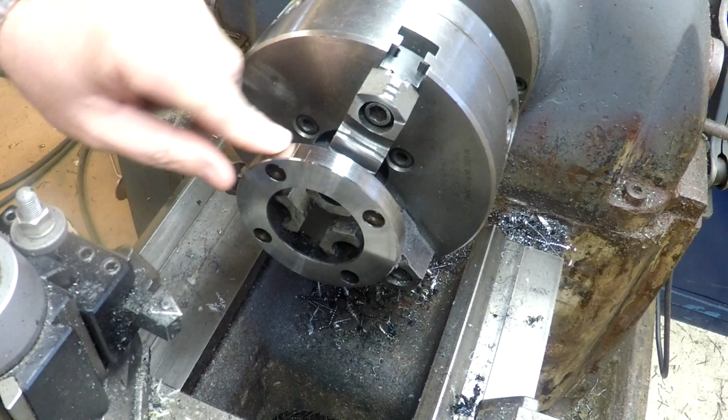All right, here's the part in the lathe, and I've already taken a cleanup cut on this OD. Literally just the minimal amount that I could take off to get rid of all the paint. And I took a very slight face across this front, put a nice chamfer on this corner here so that I don't cut myself wide open.

And you see I'm holding it on the ID, and the ID is the one that's really bad. Got a ton of paint gooped up in here. So I'm going to swap these jaws around, grab it on the OD, and then we're going to take a cut on the ID. Then we're going to move over to the mill and put this extra set of holes in here.

All right, we're going to go ahead and swap our jaws around here. And you know, this is a task that you do a lot if you're doing a lot of work on the same machine.

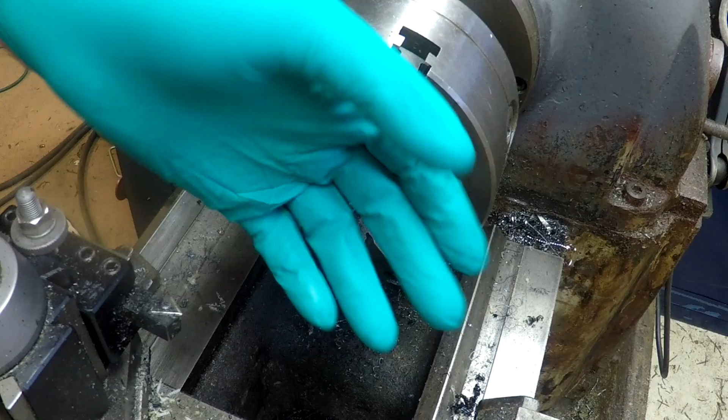So you notice I have a glove on my left hand. Those fingers that I sliced are still recovering, and I don't want to get cutting oil and other contaminants in those areas. So I'm wearing just nitrile gloves. These will tear quite easily and rip right off your hands, but I will be very careful.

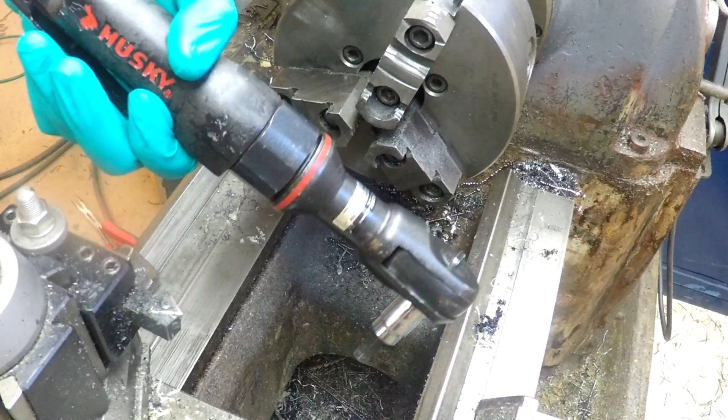So my favorite tool for changing the jaws around is a little air ratchet. This is just a little cheapo Husky, Home Depot brand 3/8" air ratchet. But it sure does make the job a lot easier. All right, we're swapped around, clamped in here.

Okay, I've already taken a facing cut on this thing, and I just want to clean up this ID, so I'm just going to manually kind of line it up. Spin it around a little bit.

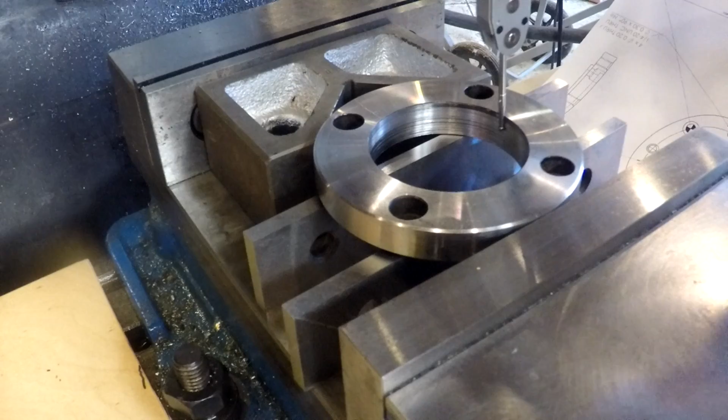Alrighty, we got our part in the spindle here. We've got an indicator, and this is the trusty Noga indicator holder that's designed to go in your spindle nose. It's in a drill chuck right at the moment. And so I'm indicating front to back.

All right, real close there. This is a 10th indicator, so it's probably a bit much for this app. There you go. So that's front to back. I'm real close there on my Y, so I'll zero my Y. And then I'll go on the X and do the same thing.

A little bit of a ways out there. So once I've got my part centered on the X and the Y, I zero both of them, then you can just give it a swing around and you should stay pretty darn close.

By the way, this isn't a 10th indicator, this is a 5/10 indicator. So I'm within 5/10 here all the way around, so that's way good enough for this application. So we're going to go ahead and break down the, take the indicator out. That's a little compact.

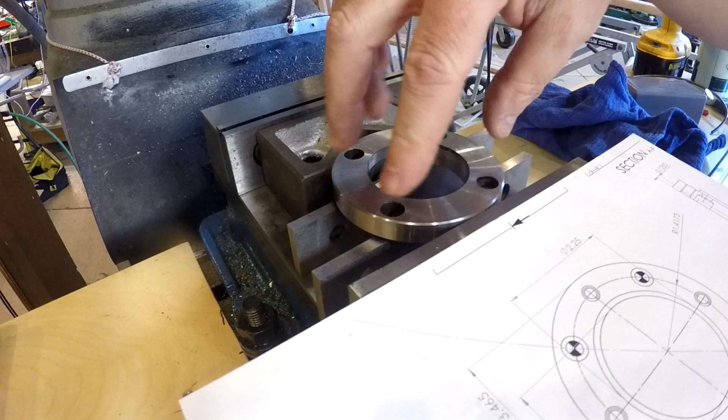And what you see here in the drawing is the existing centers of the existing holes, right? And then the centers of the new holes. So what we have to do next is, now that we've got it centered here between this V-jaw and the fixed jaw, we've got to get this rotated to where these holes are lined up, so that our new holes end up in the proper positions relative to the existing holes.

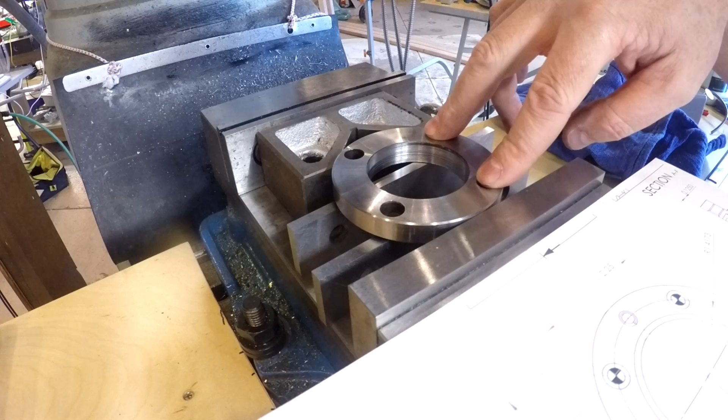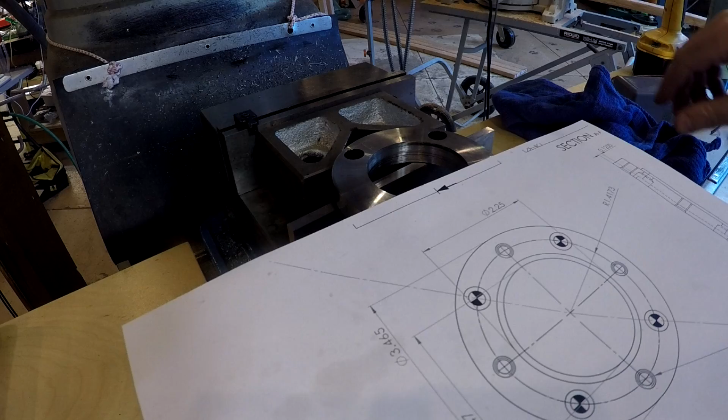Now there's a couple things we don't want to happen here. We don't want this V-jaw to move. So I'm going to set my little stop here so that the V-jaw won't move. And we're going to need to put some pins in here so that we can make sure that we're lined up straight along here. So I'm going to put some pins in here so we can put a piece of like a parallel on here, and then we can indicate off of this parallel to get these lined up straight.

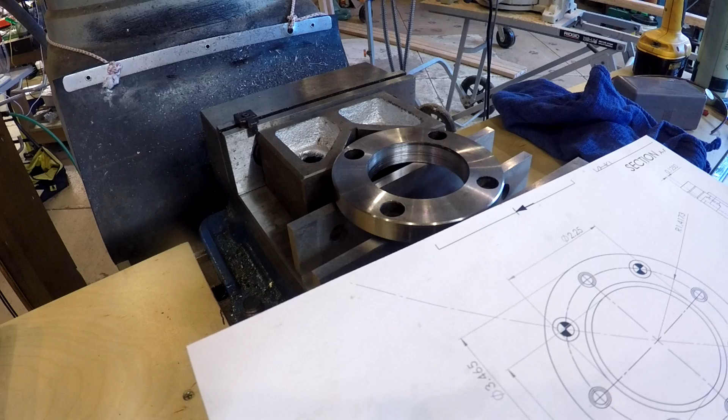Alright, so we got 2 pins, which in this case are size W drills, which are a nice firm fit into these counter bores. These are metric counter bores, counter bores for a metric M7 bolt. So, excuse me, it's a size Z drill. You're probably wondering to yourself, Killer, why do you have 2 size Z drills? Well, anyway, this is a big piece of tool steel, ground tool steel.

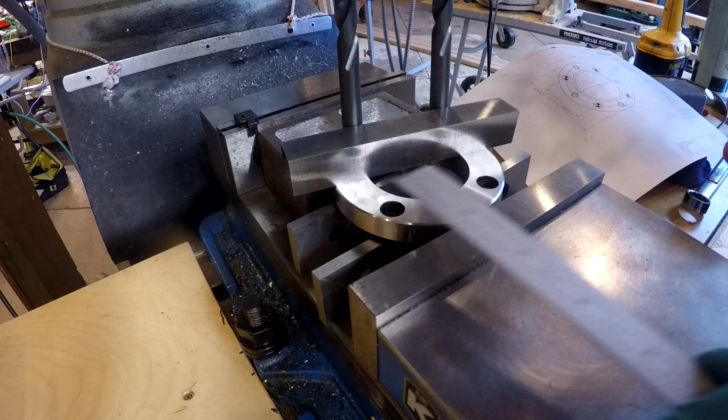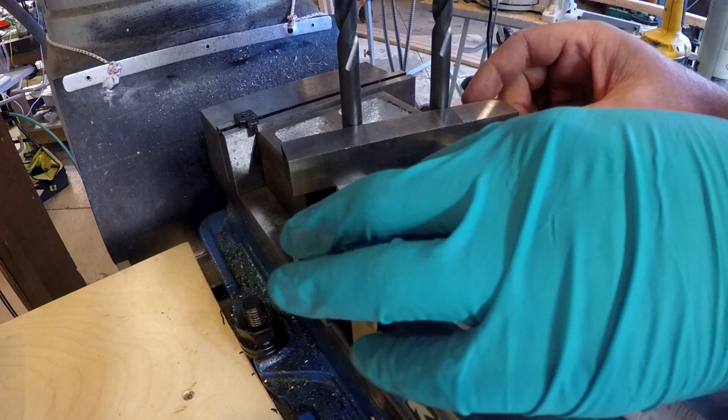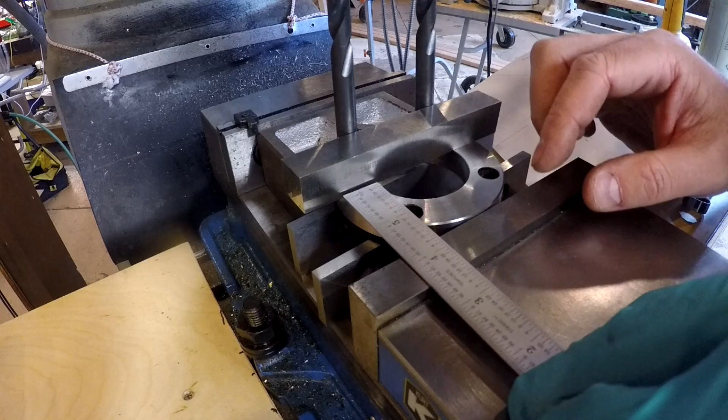And then all I'm going to do right now, I'm going to get close just by taking my little hook rule and very gently rotating this around until I'm close. Just by eye. Alright, that's pretty close right there. So I'm going to get the indicator back in and we're going to sweep this face, and that'll line these 4 holes up just about as parallel as I could want to get them.

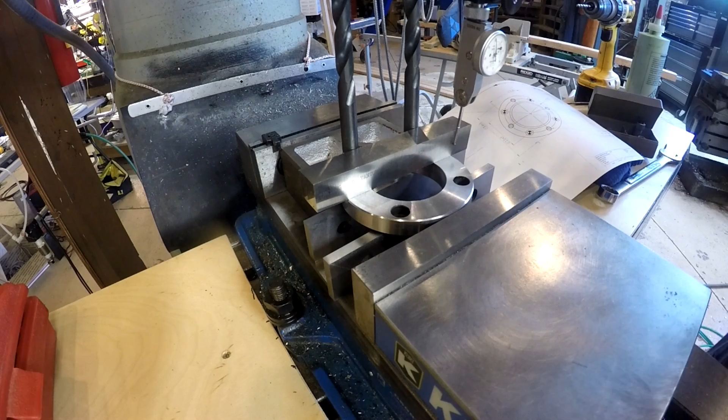Alright, got my Noga indicator holder back in here, got my indicator back in. I got about a turn of preload on there against that piece of tool steel. Make sure everything's snug. Now this is tricky because you just got to get a number, and then you cannot move your spindle, right? Okay, I'm less than a tick off, so let's try it one more time.

Okay, I'm still less than a tick off, so that line up with the ruler is pretty darn accurate. Don't underestimate a quality scale and, well, good reading glasses. So you young guys wouldn't know about that.

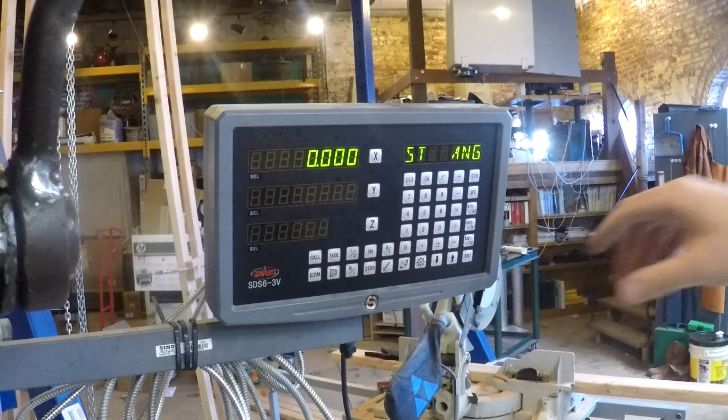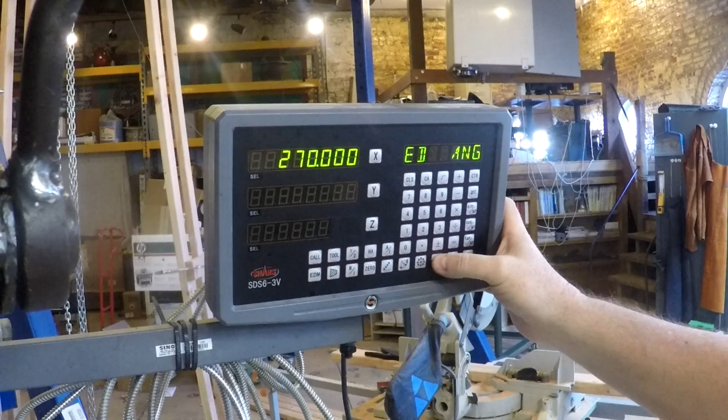Down arrow. Number of holes. We're going to have 4 holes. Enter. Down arrow. Starting angle 0 up top. That's where we're going to start. And ending angle is going to be 270, which is where we're going to go all the way around. And down arrow. Okay, first hole.

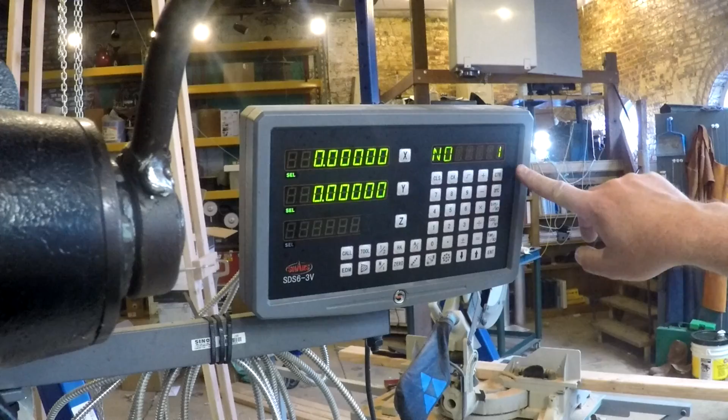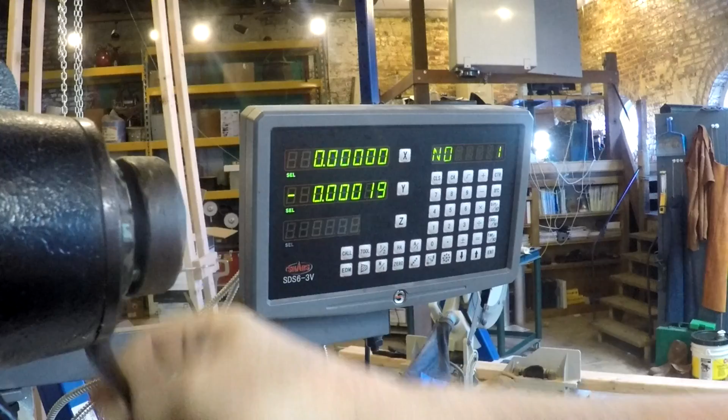So we're going to come over until our X reads 0. Alrighty. So run hole number 1, X reads 0, and then we're going to do a little spot here. Running backwards. Now, you see this jumped a little bit. Nah, no big deal, right? So hit next hole. Alrighty.

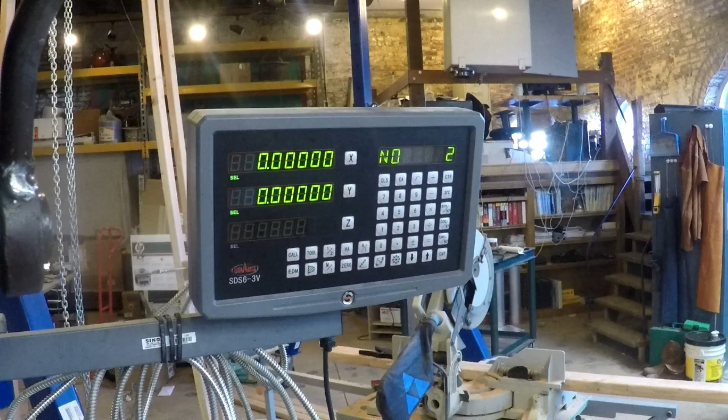All right, once we're zeroed, do another spot. And we just hit the down arrow, hole number 3. So anyway, we just keep following it around, and it keeps giving us coordinates. So in this case, I'm going to make 3 laps. I'm going to make 1 lap spotting, 1 lap drilling through with a number 7, and then 1 lap tapping. And I'm only going to change my tools 3 times.

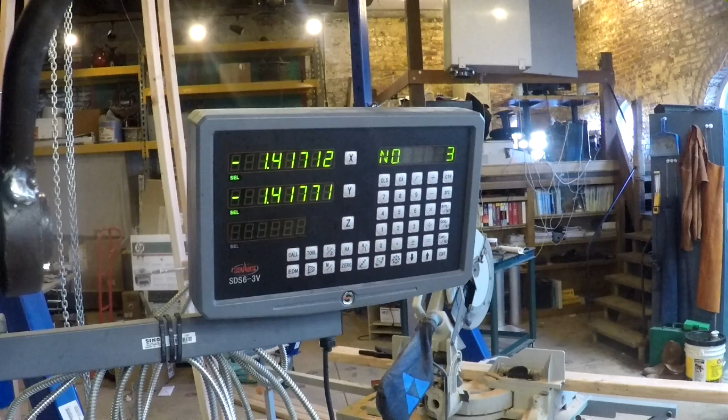The DRO is plenty accurate to put you back on the hole every single time without having to swap tools at every hole. But I'm not going to make you sit here and talk you through all those moves. That would be just boring. You get the idea how it works. You keep hitting that down arrow, it's just going to keep rotating on around.

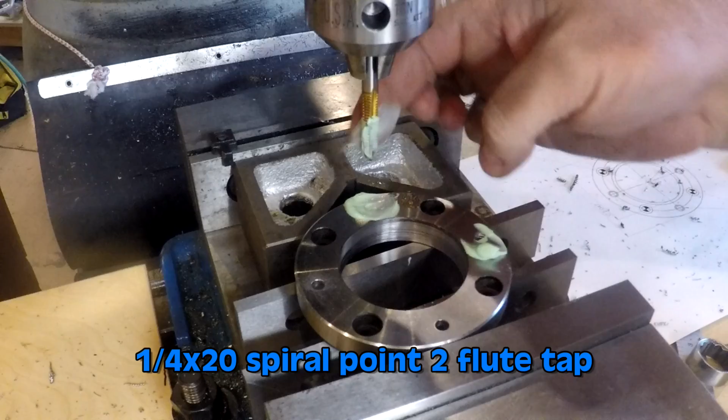We've gone around, spotted them, drilled them, and tapped them. So this part is ready to mount back on the machine, and we're ready to move forward with mounting the power feed adapter on and the power feed itself. So let's go ahead and take this out, clean up the anchor lube, and then get on about it.

All right, we got our part drilled and tapped for this extra bolt hole pattern here, and we're going to get about remounting the shaft in the machine and getting this all set up. I drilled and tapped these 1/4x20 using an

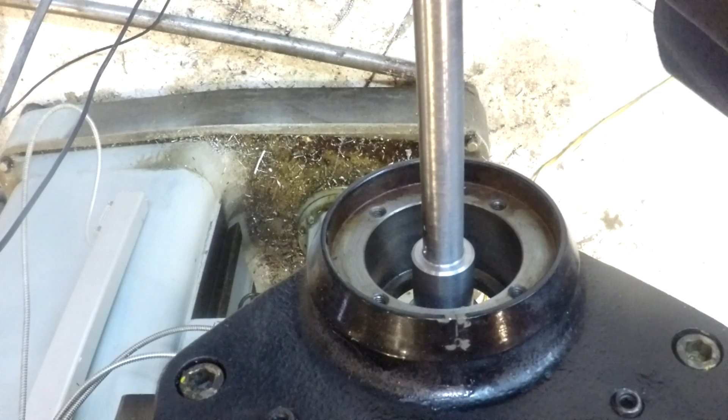Anyway, let me get the camera aimed around, and we'll go about assembling everything else we need to get this thing mounted. Sorry for the upside down shot. So what we're going to do right now is assemble this as a little mock-up. I have not put the bearings in yet because you have to press those in, and that's kind of a pain to undo, so I'm just going to wait till everything is complete. So right now I'm putting in the bearing retainer.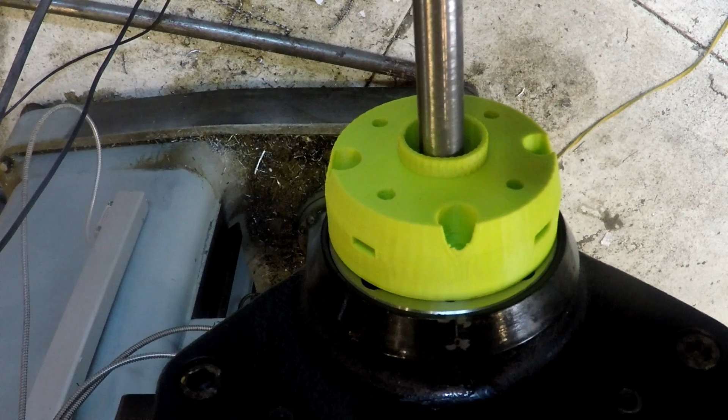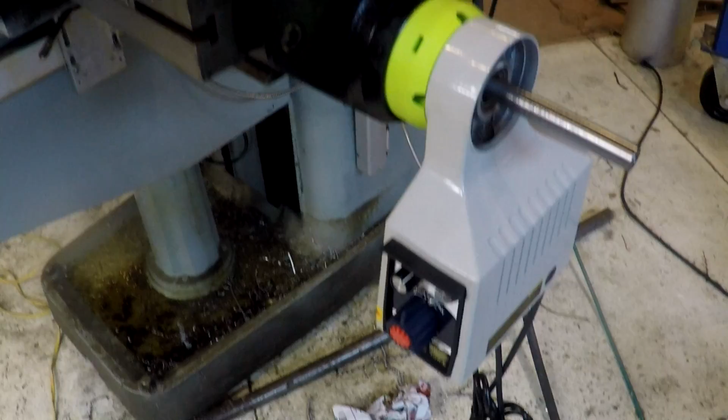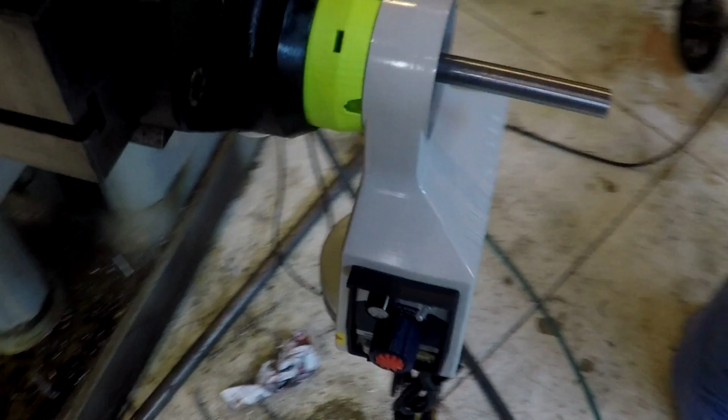Now we're going to mount up the adapter. Like I said earlier, I have no idea if these 3D printed parts can be up to the task, but we're going to give it a shot. Alrighty, there you are, mounted up. Off video a couple days ago, I wired up this box over here to power this thing, and it'll also work for my DRO. I don't have it bolted up yet, but getting there. We've got to mock up the hand wheel now.

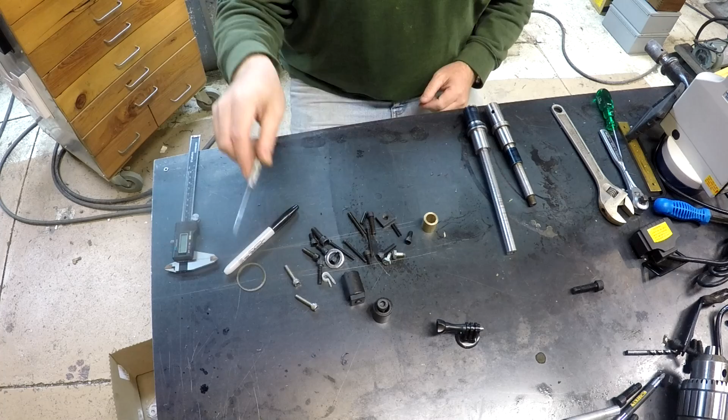That's right. Bozo has visited the shop. Bozo didn't visit the shop just once. Bozo visited the shop 2 times. But primarily one big bozo. Not a machining mistake per se, but a design mistake in this adaptation that's going to have to be overcome. So let me move the camera in closer, and then we will detail the issue here and make it clear for everybody. Alrighty, and move the miscellaneous parts out of the way.

Here's the original shaft that we replaced. Just to refresh you, this is the section that goes into the female adapter that attaches it to the lead screw. This is the section for the bearings. And there's this section here. This is the issue. And then here's the shaft with the key and end threaded for the retaining nut.

You notice my replacement is just longer, because it needed to be longer because of the space that the power feed setup needs. Here is the section again that goes into the female adapter. Here's the section that the bearings run on. There's a piece missing here. I don't know what gave me the idea that I didn't need that little section of shaft there. The bearings go here. Then I've got the bearing retainer plate. Then I've got the adapter. So about out here is where the power feed rides.

Well, the power feed has a Torrington style bearing in it. And like a lot of those, it has a hardened insert. Here's the insert right here. And, well, there you go. This ID needs to be adapted to this OD, right? It doesn't fit. So that shaft is going to have to be adapted. So what I've got here is a bronze bushing blank that is going to have to be machined on both the ID and the OD to fit this application. So there you go, that's the bozo.

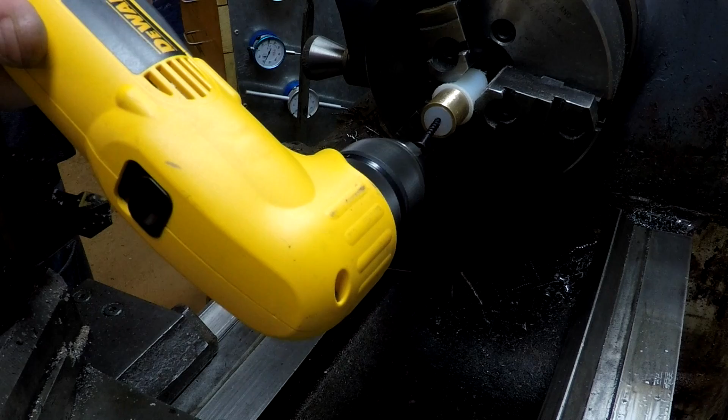Now what we're going to do is a little unorthodox work holding technique. We're going to take a screw and we're going to screw straight in here. There you go. Now that baby is on there. So here's the bushing that we need to fit on the OD.

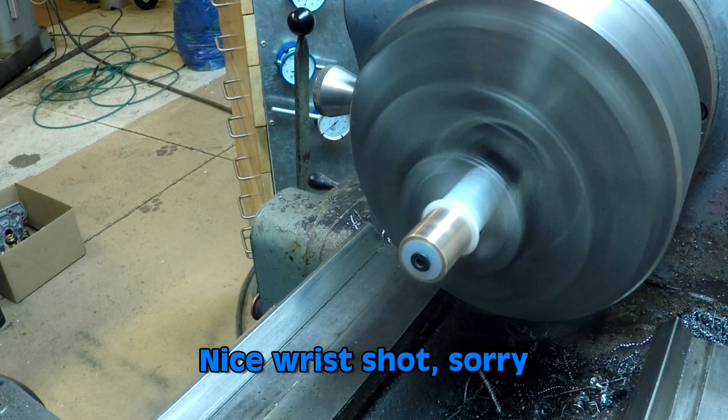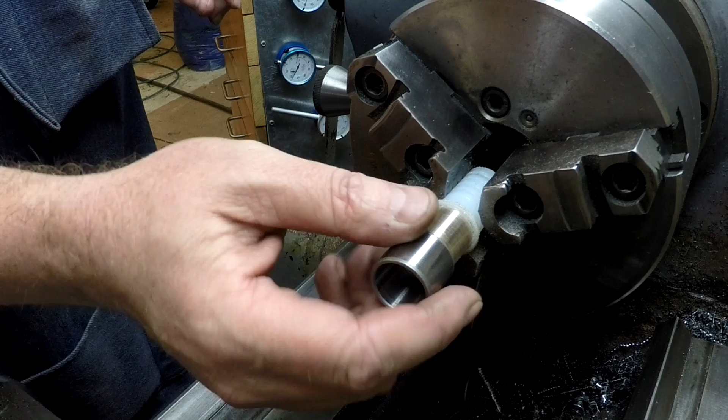Almost. Not quite. Good enough. That'll give me a really nice little light press fit, which will keep this bushing in there. There you go. That's Kilroy's unorthodox work holding technique of the day right there.

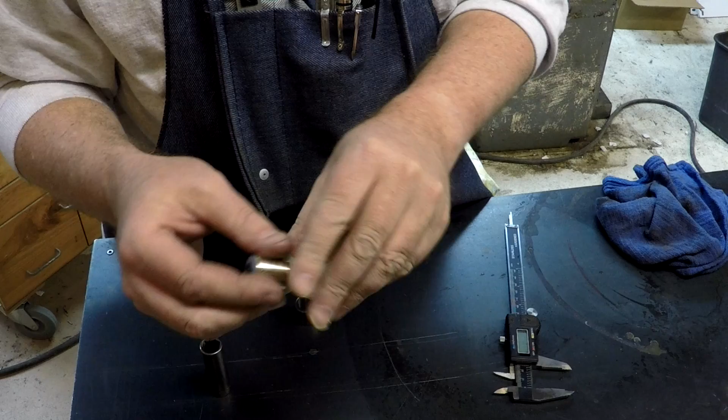All right, there you go. Little screw down in here. Just expanded that plastic and gave us a nice grip fit. This little piece of plastic here is, you know, sacrificial. You can throw it in the trash. And the bushing just starts, wiggles on into the hardened bushing that has to go around it. So I'm just going to press that in there. And this part of the adaptation is finished.

Now this technique, the little screw expanding mandrel technique, you can take light cuts and obviously do finishing techniques like filing or emery paper, but you can't take heavy cuts. There we go. There's our sacrificial piece of plastic.

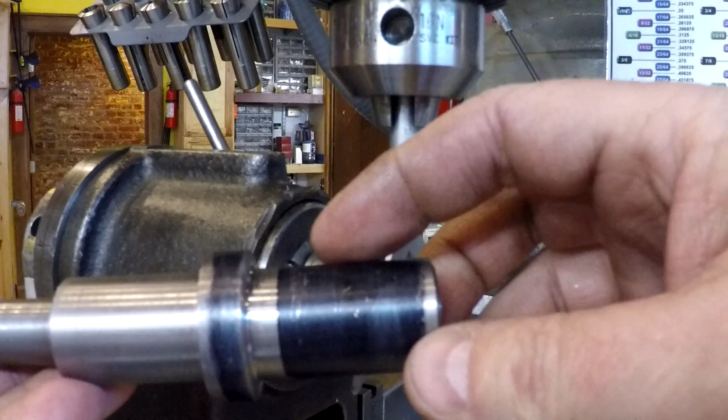All right, we're back over at the mill. We've got our shaft here. And what we want to do now is drill the cross hole. There you can see the one in the original part. We want to drill the cross hole to hold this end of the stub, the female stub, off the end of the lead screw. It takes a 6mm split pin.

And the dimension that's important here is the dimension from here, from this surface to the hole center down here. This dimension is not important. This dimension is important. So what I did is I took the original part

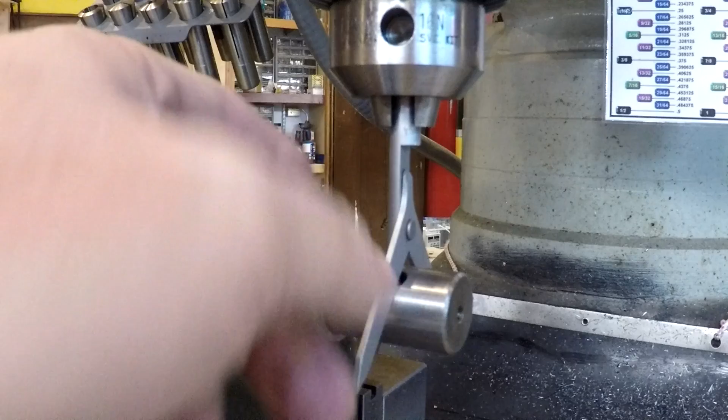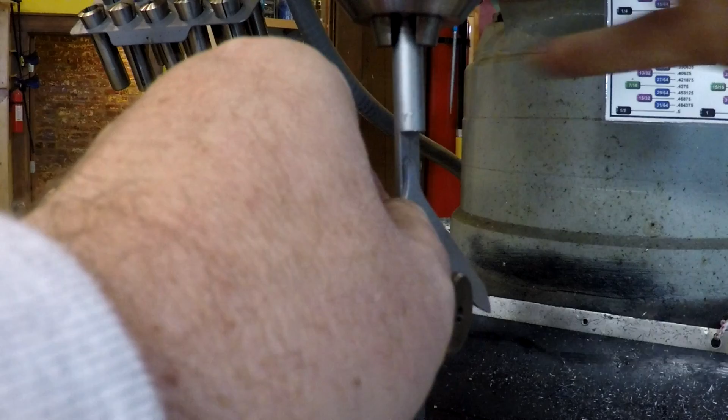and put it in. I've got it in the bearing area, this area here, in a 5C collet, in a collet indexer that's just sitting in my Bridgeport vise in my mill. I use the handy little centering fixture. Some people don't like them, but I certainly do. They worked out real well. And use that to center it up and lock my Y down.

And now I want to get this dimension right here. I want to get centered on this hole, the factory hole. So I'm just going to loosen this up a little bit. Rotate this on around, get it straight up and down. I already got a drill bit in here. This is a size C drill. It's my closest drill to that hole for the 6mm.

And now I'm just going to kind of line it up. There we go. I can live with that. Take the drill out. Put our little, we got a little spotting drill here. 1/4-inch spotter.

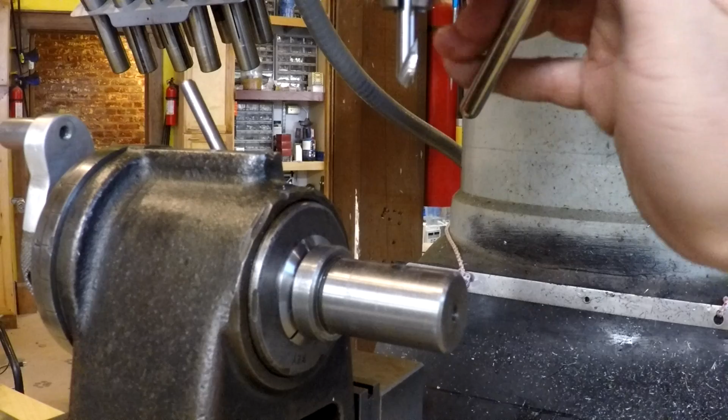Let's take it out. Put the replacement piece back in. Snug that up in the collet. There we go. Wrong way and back gear, all sorts of stuff.

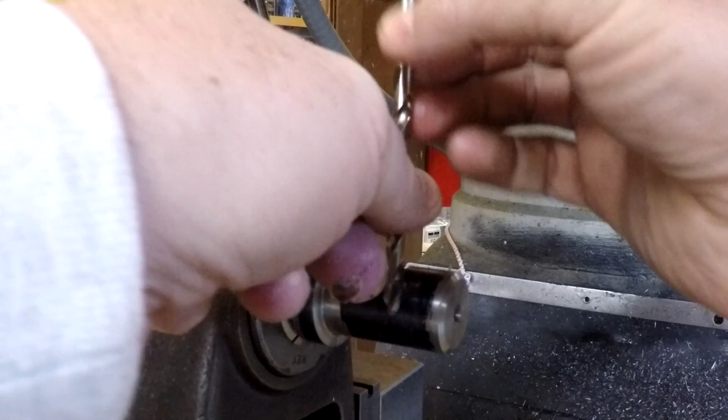Alright, we got a spot. Spotting drills are the bomb because they have the same point angle as your drill, right? So when your drill hits the spot mark, it isn't chattering a couple of cut lips. Let's go and drill on through.

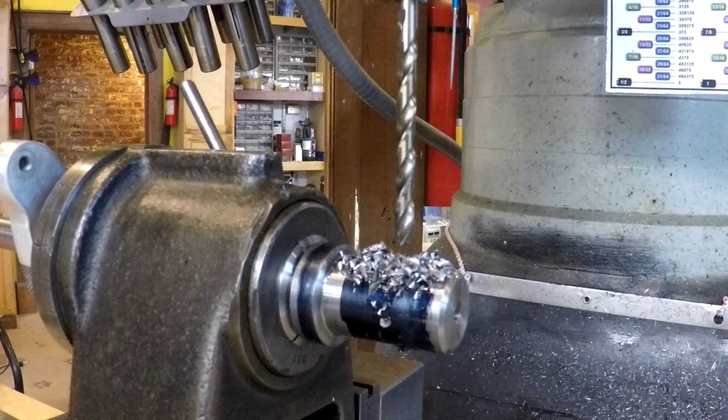Alright, there we go. So our through hole for our split pin is in place. There we go. And let's keep moving. Alright, so we've got our bushing here made. Rides on here. We've got our split pin hole made. We're about ready to fit this thing up.

We just need to discuss the last item of, I guess, adaptation contention. I guess you might call this a visit from Bozo, but not really. It's just a peculiarity of the machine. This is the dial. So the way this thing all goes together, the shaft comes through like so, then the drive gear takes the place of the old holder. This was the holder for the dial. It takes the place of that.

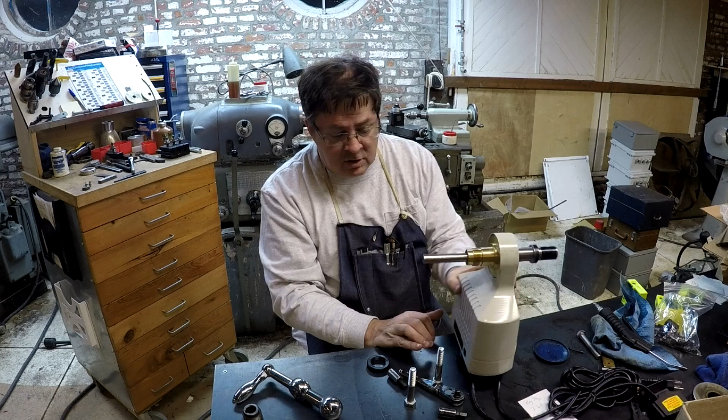Well, I don't really care about these because the machine has a DRO on it, and it's been so long since I've used a dial on that machine that I honestly just don't even remember. So I don't care about that. But I still need a way to fill this gap and seal around this surface so that grit and swarf and other nastiness doesn't get down in here with the gear.

And then once that's in place, then your handle, the actual crank handle, goes on, and you notice that I've got plenty of extra length here. Once this is all fit up, there won't be as much extra length. I've got to turn and thread this end for the nut to hold all this in. This nut that goes in here is what holds everything in, including the drive gear, everything else, it all gets held in with that nut.

So what I've got to do now is go ahead and get this all mounted up. Go ahead and install the new shaft with the split pin, at least started in, and go ahead and mock this all up so that we can figure out how long I need to cut this off so that I can get this turned down for the nut to capture all this in. Once that's done, then it's really just a matter of shimming the unit and powering it up and running it. And figuring out what we're going to do with this gap.